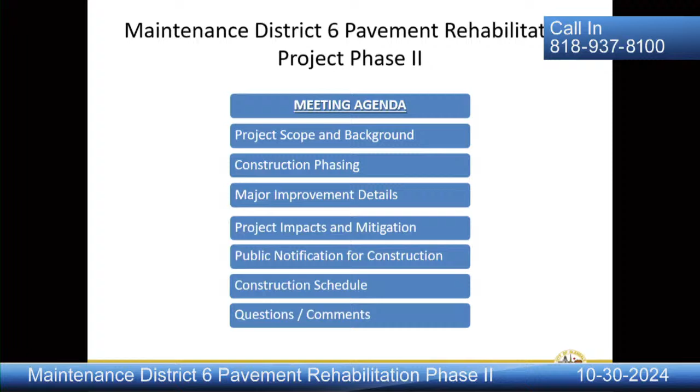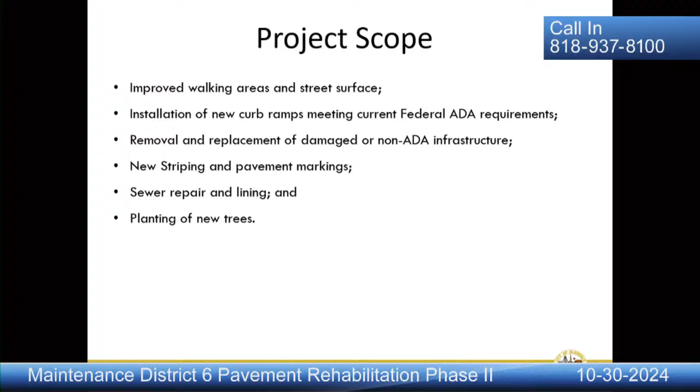Construction will be completed over 6 phases as outlined on this following slide. Phase 1 will include concrete improvements. Phase 2 will include asphalt pavement replacements, followed by street resurfacing, which is typically grinding and repaving of the street. Phase 4 will include utility adjustments to new finished grade. Phase 5 is the installation of traffic striping, signing, and pavement markings. And finally, Phase 6 will include tree planting.

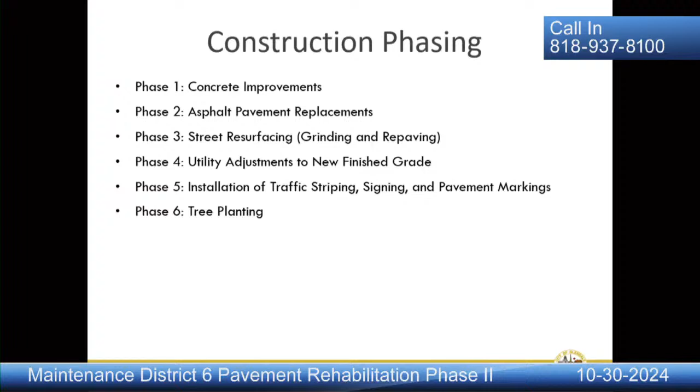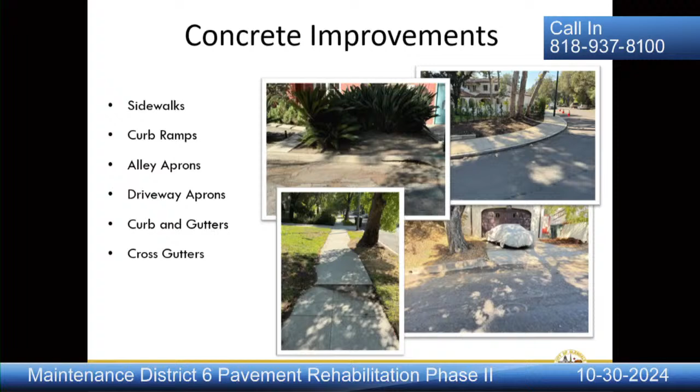The concrete improvements will include repairing damaged sidewalks, curb ramps, alley aprons, driveway aprons, curb and gutters, as well as cross gutters. Asphalt pavement replacements will be completed over the 3 criteria, such as base failure, potholes, as well as pavement damaged by tree roots.

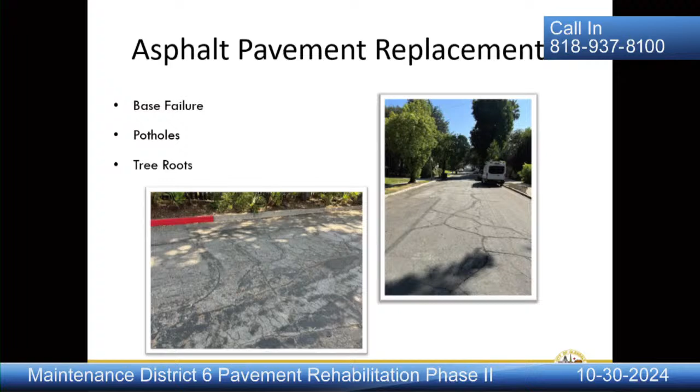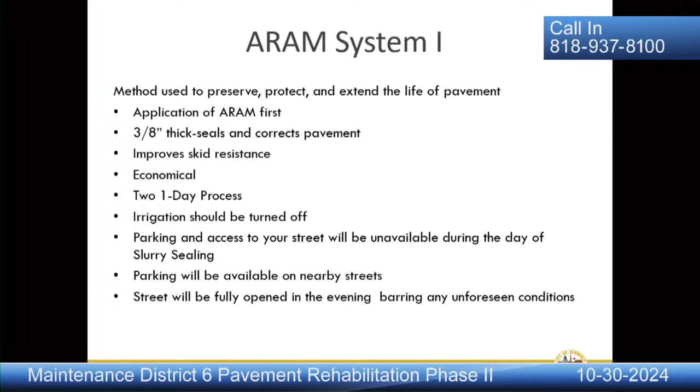A couple of the pavement treatments that we have identified as part of this project include ARAM System 1, which is a two one-day process, which includes installation of ARAM on top of the existing surface, followed by installation of slurry seal. On this slide, you can see the installation of ARAM System 1 completed over 3 steps. This typically includes the installation of the intermediate layer on day 1, and day 2 will be the installation of slurry seal. This is concluded by the final striping and pavement marking.

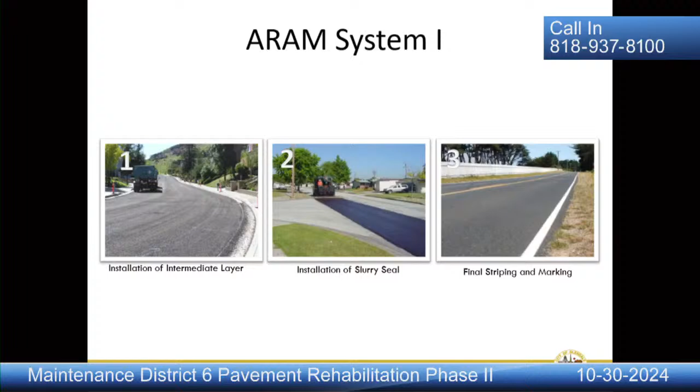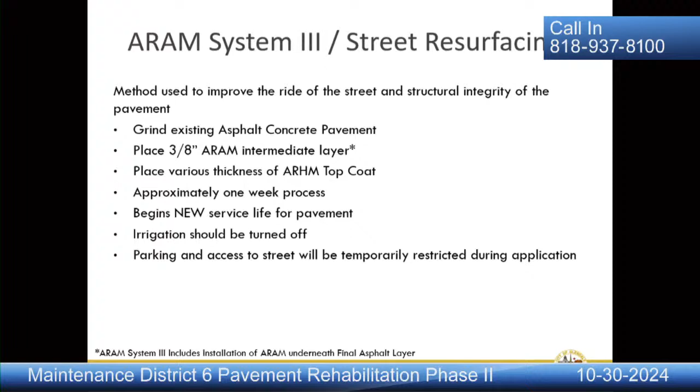ARAM System 3 and street resurfacing is typically a 1-week process, which includes grinding the existing asphalt concrete pavement, placing an intermediate layer, and this will begin a new service life for the pavement. ARAM System 3 and resurfacing is typically completed in 4 to 5 steps, with the removal of the old asphalt in step 1, and the installation of an intermediate layer included as part of the ARAM System 3. Step 3 will include installation of the final asphalt layer, as well as compacting the asphalt and the final laydown of striping and pavement marking.

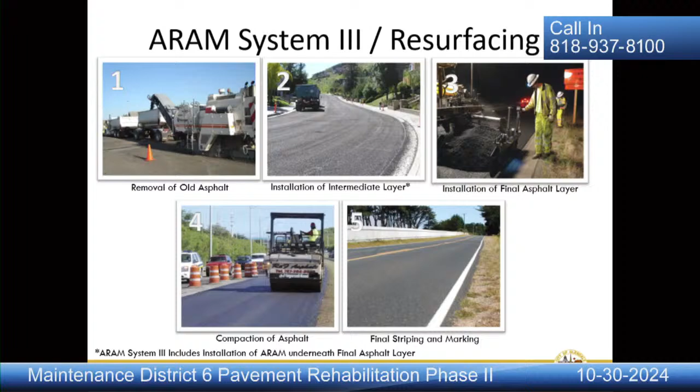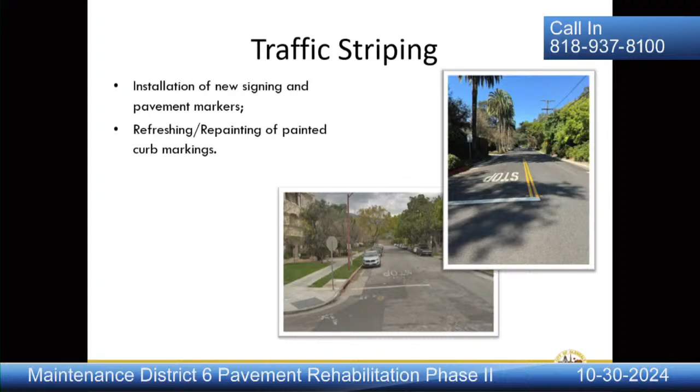Traffic striping will include installation of new signing and replacing existing striping throughout the neighborhood. Also included will be the refreshing or refurbishing of painted curb markings, such as red curbs. As part of this project, we will be planting 96 new trees per the city arborist recommendation. And you can see the listed species on this slide. A few examples include Coast Live Oak and Engelmann Oak.

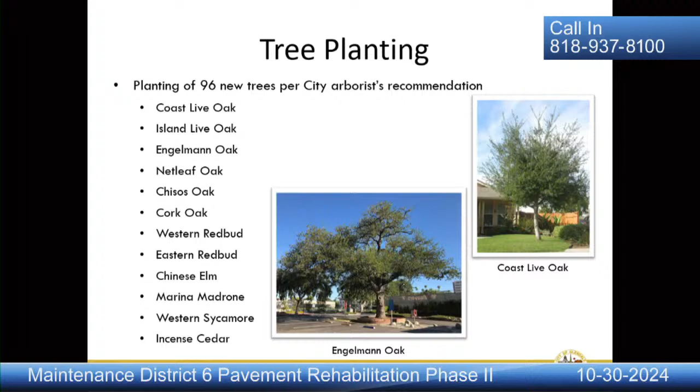Some of the project impacts you may experience during construction will include the resurfaced streets may temporarily be closed during construction. The contractor will notify residents and businesses in advance, which we will outline in the following slide. Street parking will be restricted in work areas. Construction may be allowed on Saturdays if necessary. And lastly, construction equipment and materials may be stored on the street.

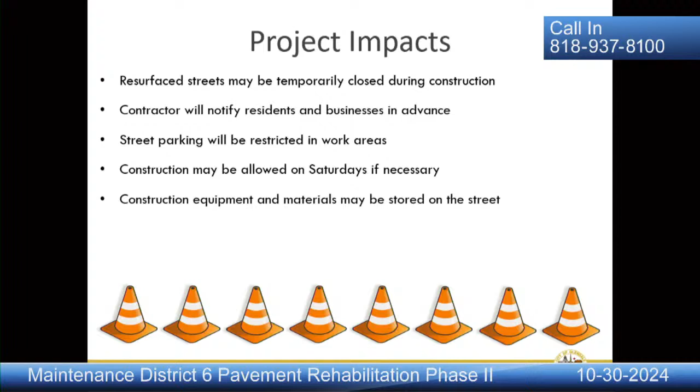As part of the contractor's mitigation plan, the road will be open and parking will be available during non-working hours when feasible. The contractor will provide alternate traffic routes and maintain access to driveways as much as possible. Street closure will be limited to the immediate work zone. Curbs, gutters, sidewalks, and driveway aprons will be constructed on one side of the street at a time. And lastly, the contractor will provide flaggers for traffic control where required.

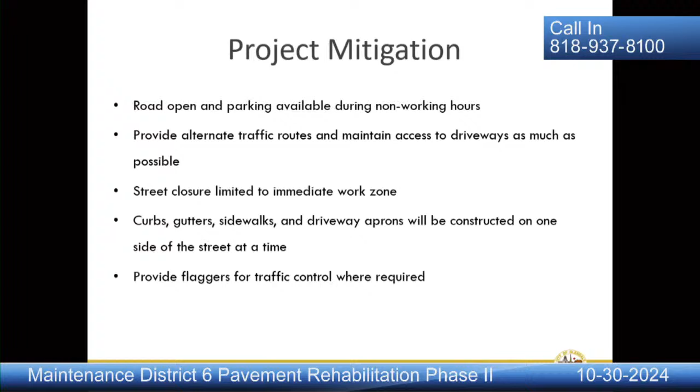The public notification process includes today's community meeting, which will be followed by a city update to the city website, as well as a bid advertisement process pending council approval of the project. Once the city obtains a favorable bid, the project is awarded, and following that will be a director's letter 1 or 2 months before the start of construction.

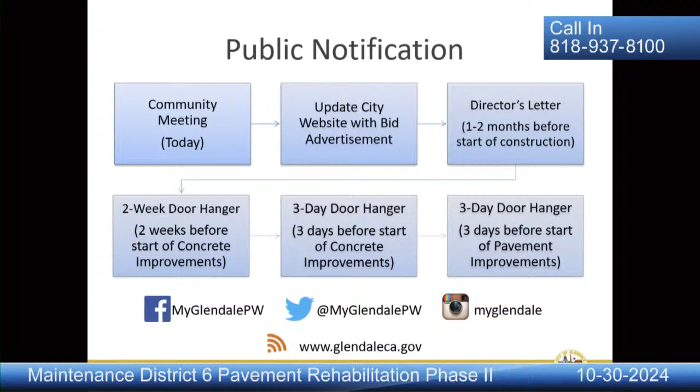A 2-week door hanger will be provided 2 weeks before the start of concrete improvements, and a 3-day door hanger will follow shortly after, before concrete improvements. And finally, the 3-day door hangers will be provided for pavement improvements in the last phase. Construction is anticipated to start in May 2025 with an end date of November 2025, barring any unforeseen conditions.